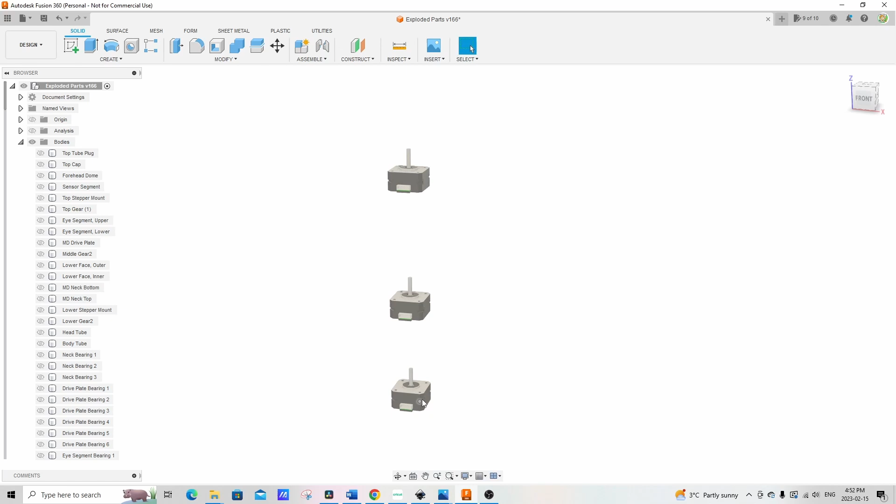Here's my Fusion file for the IG-11 head. I want to show you all the parts I've got in here and the ones I've adapted. Rather than using servos, we're going to start off with these NEMA 17 stepper motors. They're all identical, and they'll be programmed using an Arduino probably. We'll see how it goes, but that's my plan for right now.

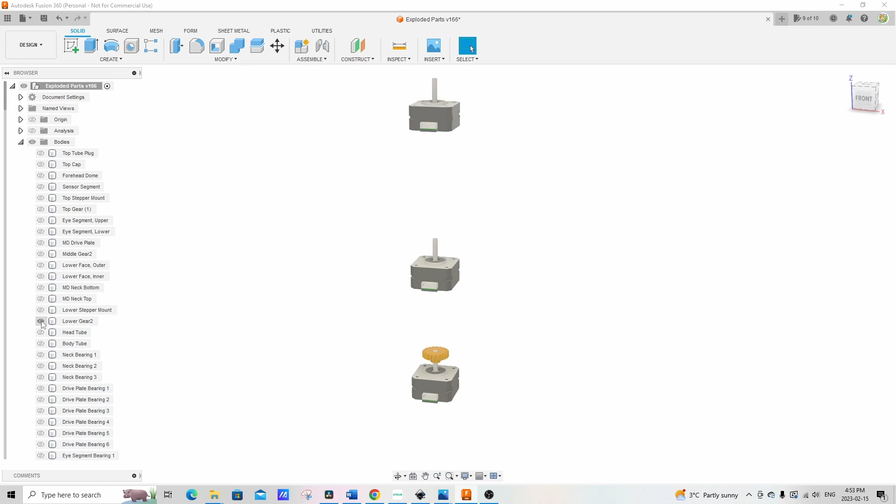On these we're going to have some gears, so I've 3D printed some gears for them - there's a gear, a gear, and a gear. These gears just fit over the top of the motor shaft, just a pressure fit, and hopefully they'll work out okay. Now let's take a look at the tube.

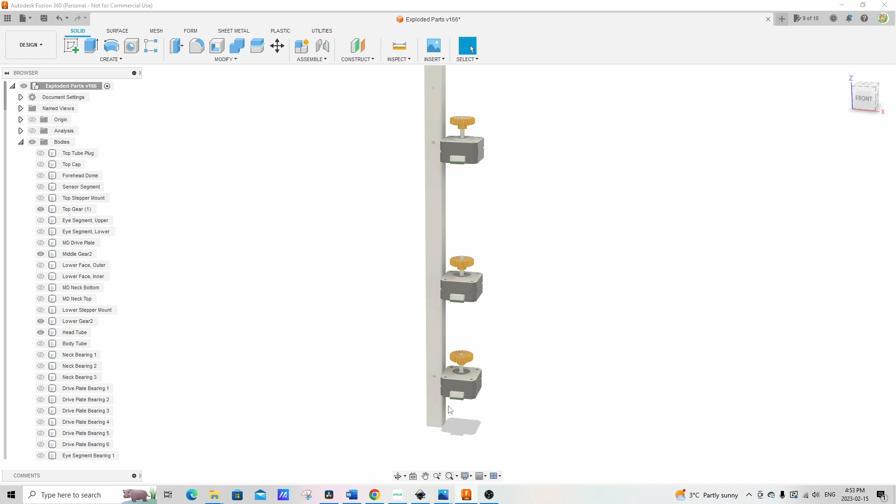This is the tube that goes up the center of the head. It's got holes in strategic locations. I've adapted the holes from the files that were provided to fit my motor system. Not only do they have these mounting holes, they'll have larger holes down here where the wires can go through and fall through the middle of the square tube.

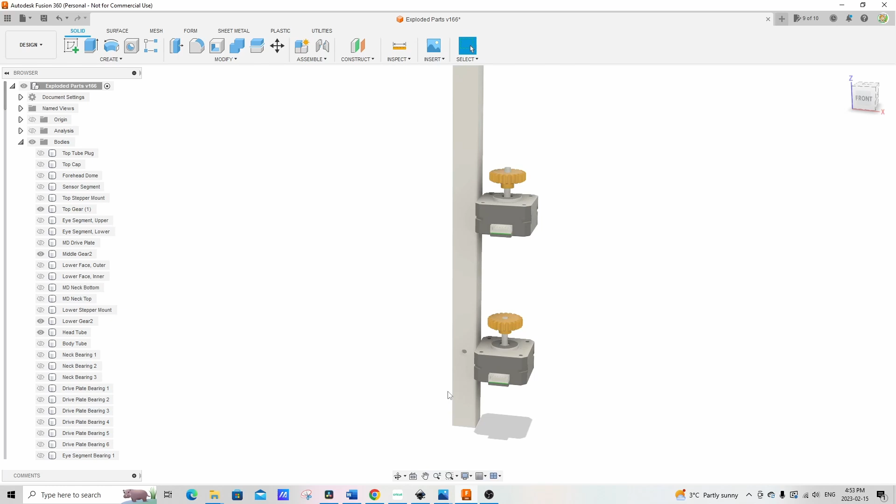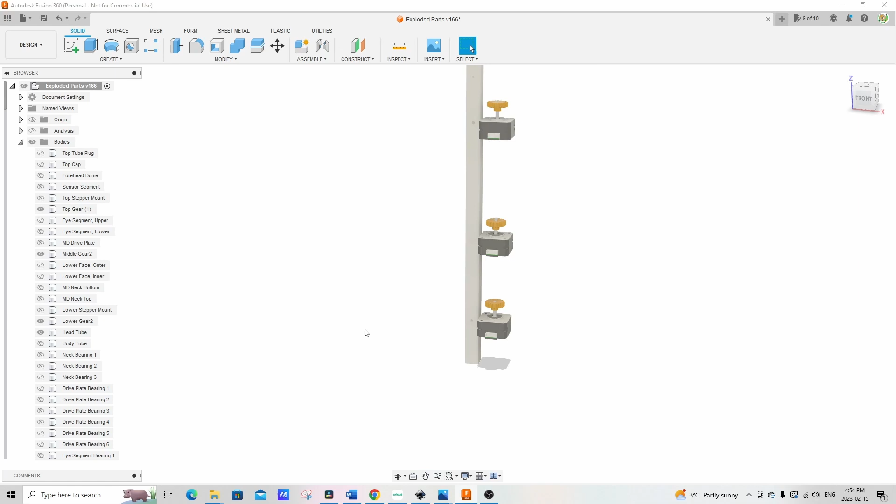So that's the tube. If you're building the whole version with the neck and the body and whatnot, there's a body tube, and basically these are 2 separate parts, they're just one long part. I've just got them colored differently so you can see where the head part stops and where the body part fits into the chest cavity. I'll take that off for now because we're not going to focus on that.

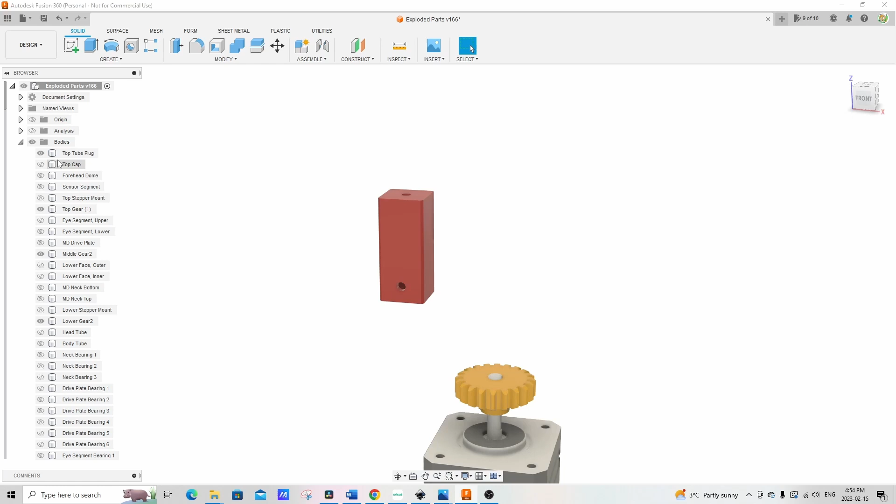Now let's take a look at the top. This is just a square aluminum tube, and the top has a plug that I've put together myself. I'm going to move the tube so you can see this is just a 3D printed plug. It's going to have a captive nut inside, so you can put a threaded M3 bolt through there, and one through here as well. The bolt through here holds that plug in place, so the top cap can get screwed into it. So that's what the top cap looks like.

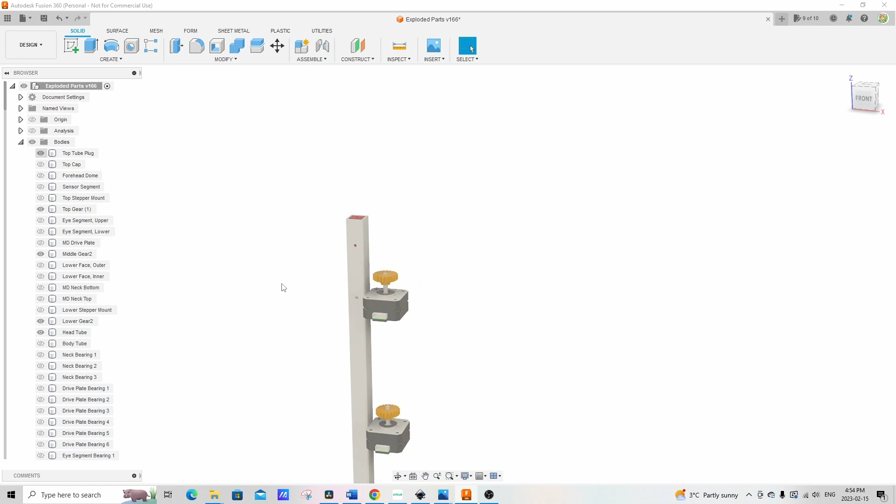But rather than that, let's just work our way through this from the bottom up. So here is the stepper mount that goes on the bottom.

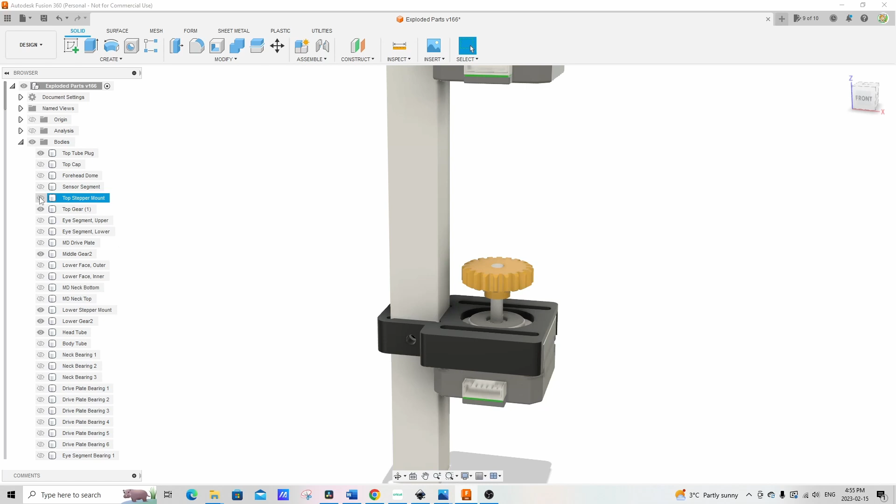So it's going to be attached with a metric bolt through here, and then bolted down here with 4 bolts as well. And there is also one for the top stepper motor, and the middle one doesn't need one because it's going to be attached a different way.

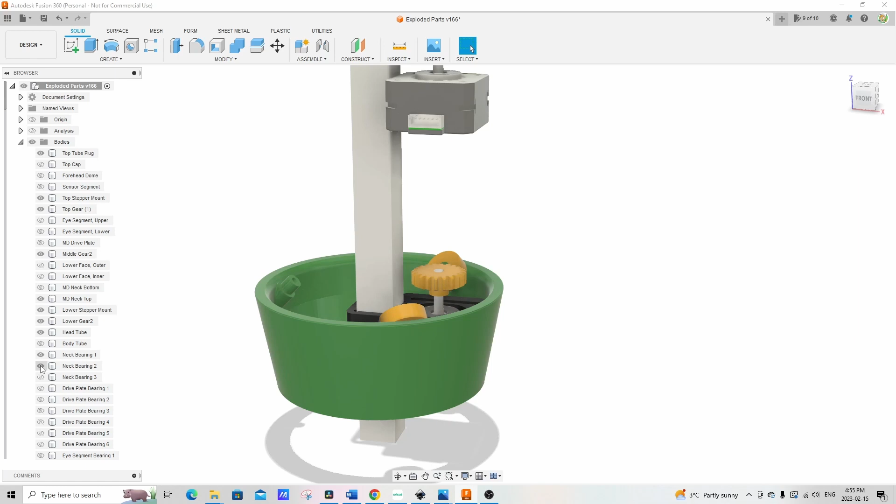So now that we have that, let's look at the neck top. So there it is. You can see that it's got a spot for bearings here. So there's a bearing there, there, and there. These bearings just get pushed on, and then there's a bolt that goes through and attaches onto there with a washer to hold it in place. And these just spin so that everything can rotate properly.

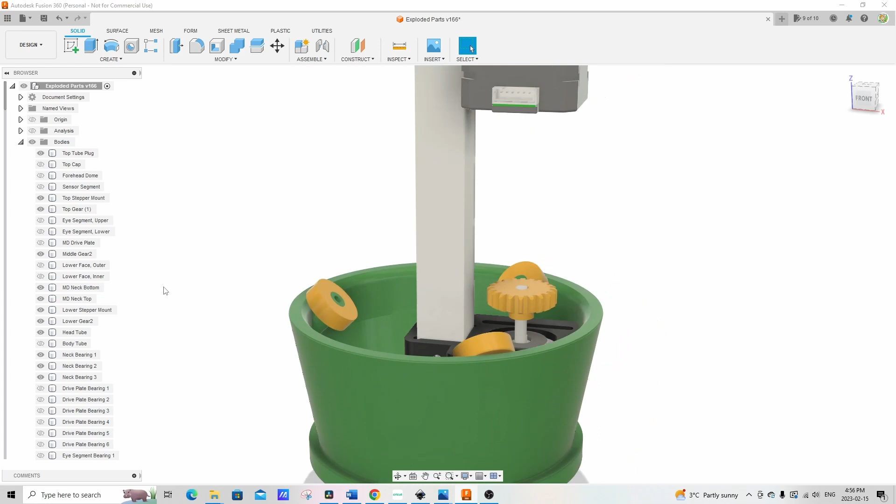I might not show you all of the bearings, but that's what they're going to look like. On top of that — sorry, that's the neck top. The neck bottom is this section right here. So let me just rotate that so you can see. You can see the bottom of the neck tube there. I'll just put this on analysis mode so you can actually see. So there's the bottom, neck bottom, and then the neck top, and basically how everything's attached.

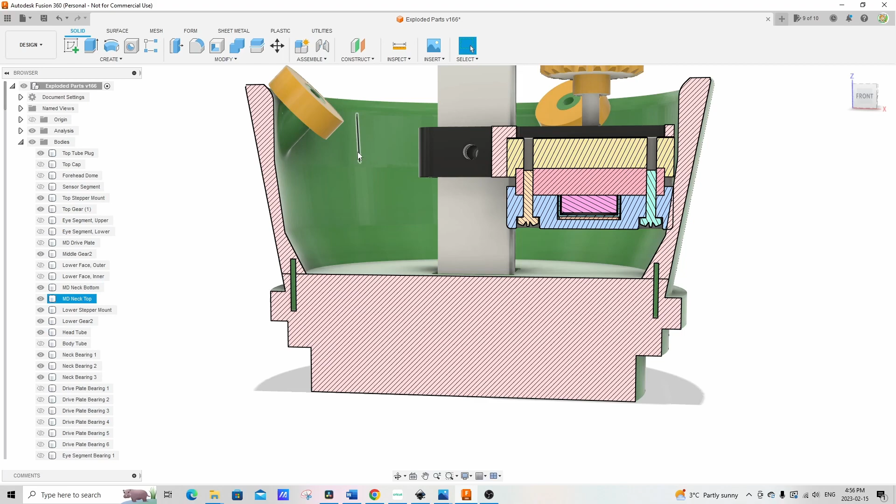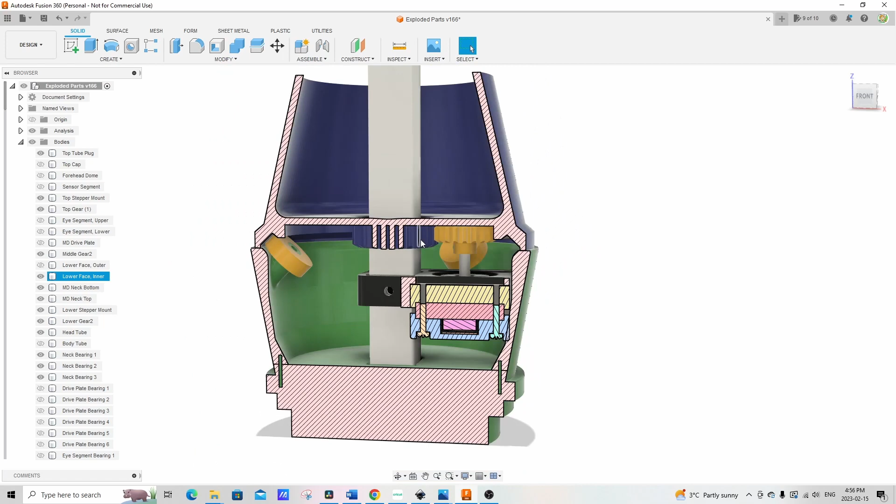So while I have that activated there, let's look at the next section. There's the lower face, the inner part of the lower face. So you can see that my stepper motor engages with the gear that's on that. And without the analysis on, that's what it looks like.

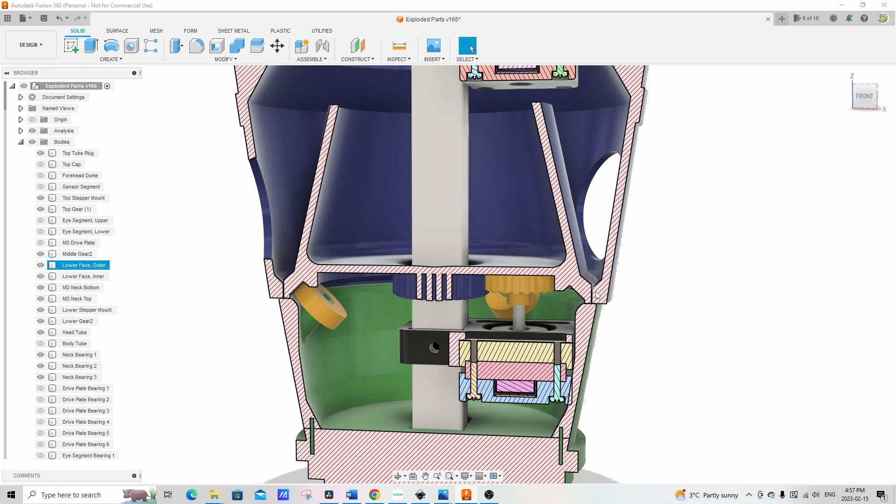And then that gets placed over top and glued in. So that is the inner part. That's the outer part of the lower face, and I'll just show you that in analysis mode. So you can see that it fits in right there. So it just gets glued in. I'm gonna finish the weathering for that before I glue it in, so I don't have to do that later.

And you can see that it's got the race here for the bearings, and then there's a race up here for the upper bearings. So let's move on to that.

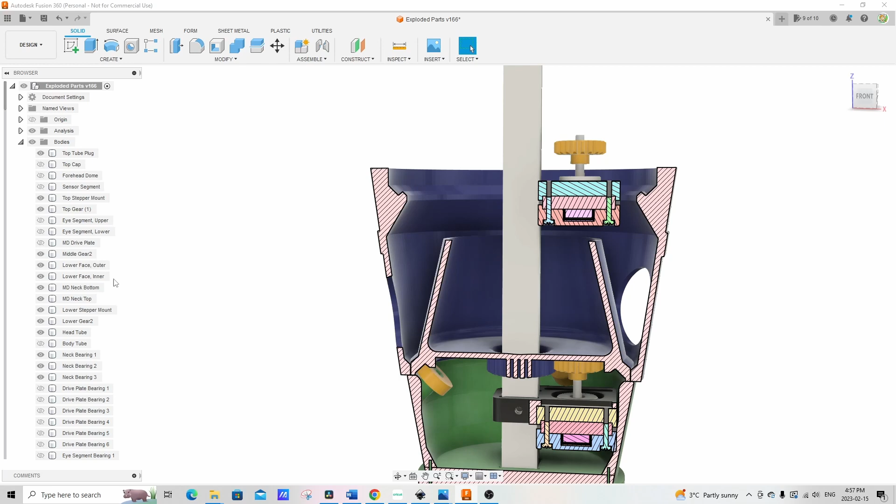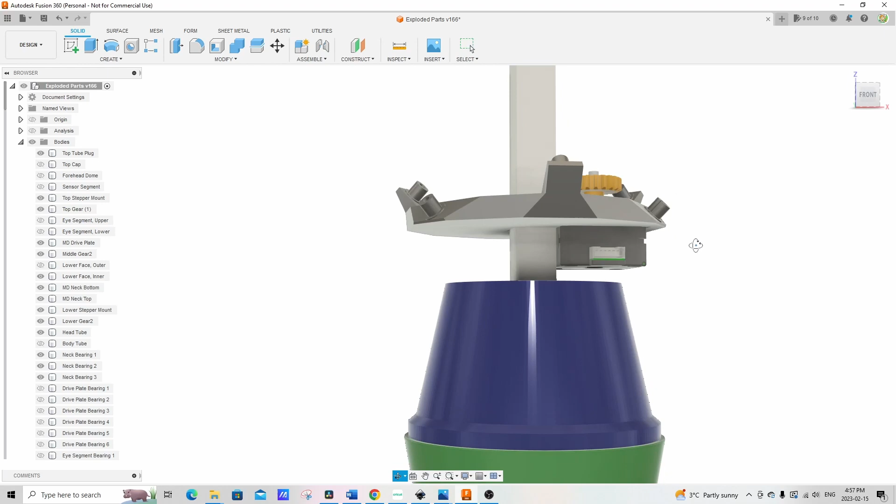Before I show you that, let's just shut that off. I'm going to take off that guy so you can see the drive plate. So this is my MD drive plate that I put together, and the stepper motor gets attached to it right here. It's not my very own drive plate — I've adapted it from the files. So you can see the stepper motor just barely fits along the edge of the aluminum tube there.

And then all of these spots are for bearings to go onto. Let me just bring that back. And the next one is that plate there.

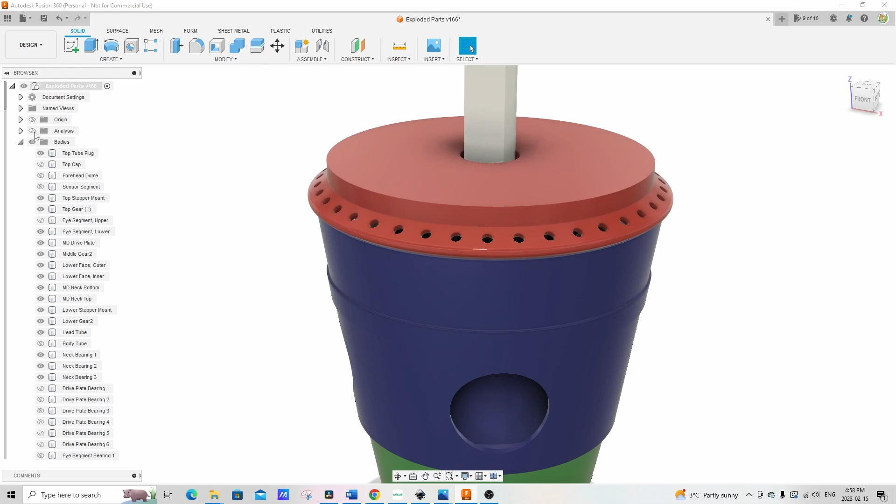That's the eye segment lower. So let's look at that in analysis mode. You can see that the stepper motor gear just meshes properly with that gear there, so it can rotate. And then there are races right here for the bearings to fit into, as well as on the other side there's bearings that go into this section as well.

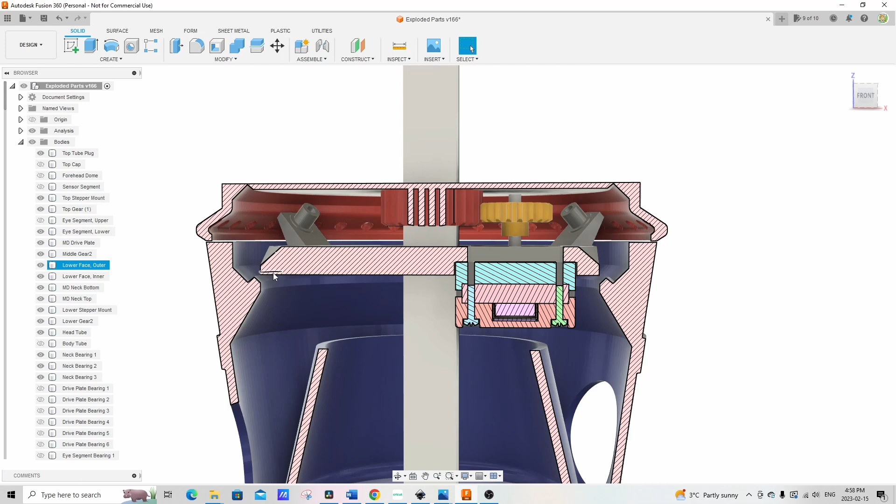So that's that. And then the eye segment upper looks like that. In here is a spot for the servo motor, which is going to attach to the eye that sticks out here and moves up and down. I haven't got that far yet. And then there's a spot for bearings right here.

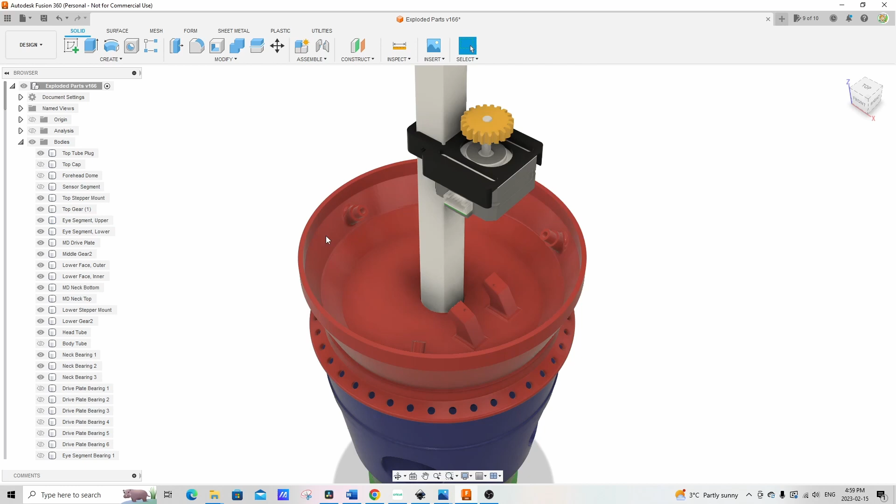And then the next section is the sensor segment. It looks like that. Inside of here will be another 3D printed housing that holds all the NeoPixels for the eyes to light up.

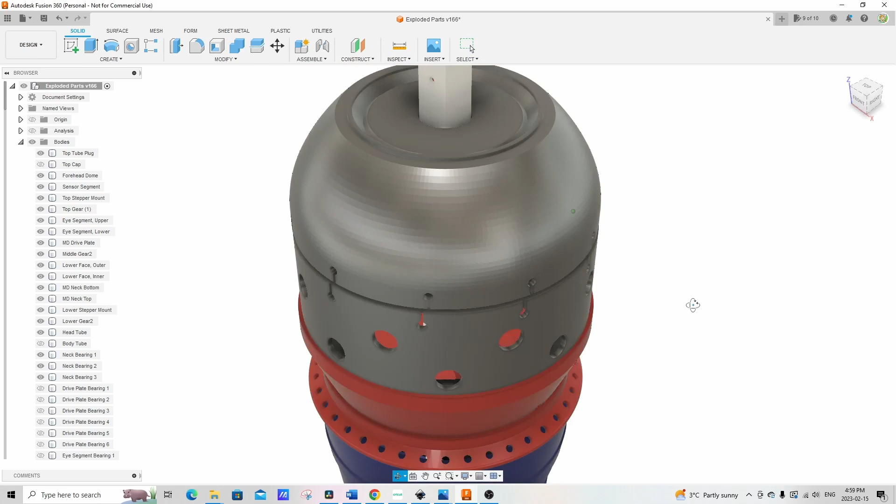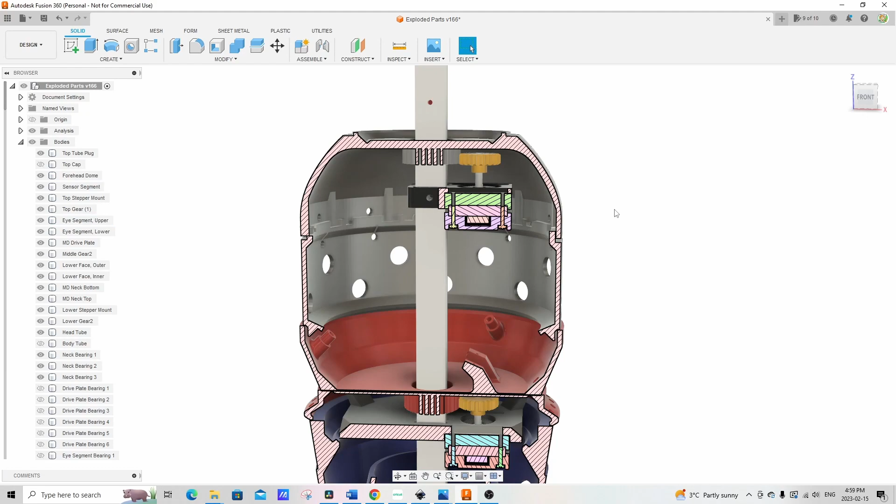And then the forehead dome looks like that. So let me put that on analysis so you can see what it looks like inside. Basically there is a gear here that meshes with that gear, so this whole section here can rotate, and there's a spot for the bearings here that hit the race inside there. And then on the very top is the top cap, which gets placed on like that. There's bearings in there that run along the race for that.

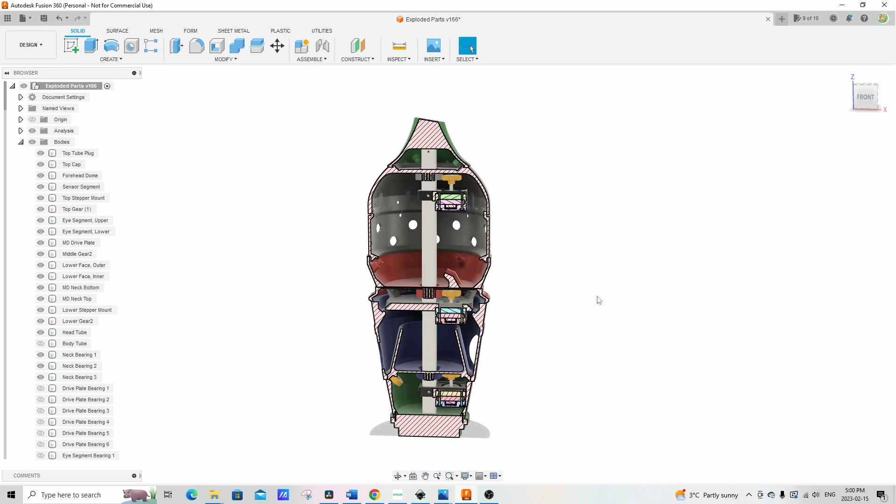So that's basically what the adaptions are that I'm using, that I've put together for the IG-11 head, and we're going to see how that goes. This is just a trial, so let me shut that off, and there's the different sections for them.

Let's move on. I'll just show you what the 3D printed parts look like, and then we'll get into the next step where we're going to power up the stepper motors and see how they rotate.

Okay, let's take a look at the parts that I've printed off for IG-11's head. I've printed them, sanded them, primered them. They're ready to have some weathering put on them, but before I do all of that, I'm going to make sure all of the animatronics work properly.

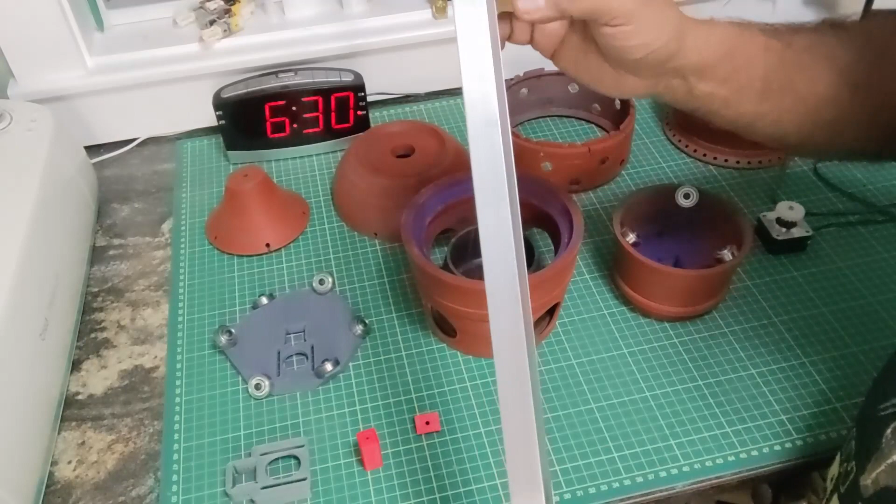This is the aluminum tube that is used for the animated head, and I've already cut it to length. I've also put a sticker on there to show me where the head part ends and the body part continues, and then spots for all of the holes.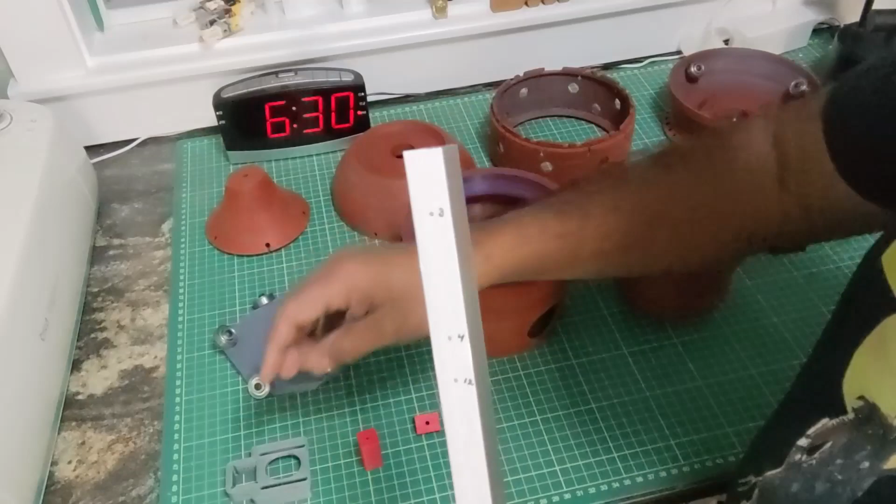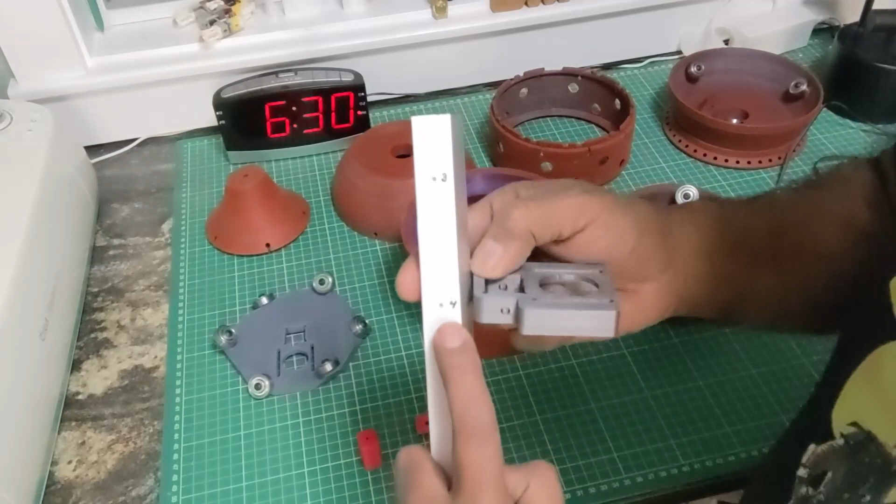Now these holes are strategically placed for my adaptations for stepper motors. So basically I've made these mounts that hold a stepper motor. This gets pushed down over top and slides down to where it needs to go, and then it gets held in place with a bolt. And all of the nuts inside are held on these sleeves that I have, so they put a captive nut in there, and then this gets pushed in, and then you'll have a place to bolt onto.

The top plug is one that I've designed that's going to have a captive nut inside for this side here and for the top, and this gets pushed down inside there to be flush, and a bolt holds that on.

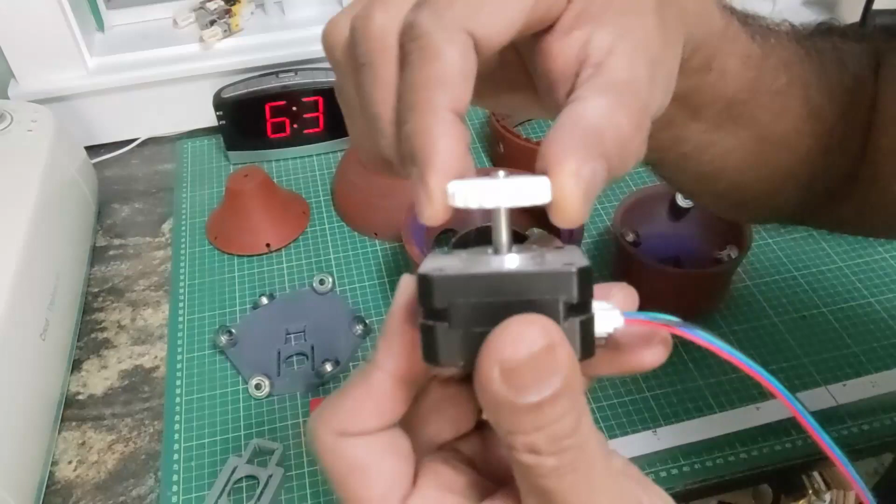So the stepper motors that are going to be used look like that, and you can see this one here has got the gear on it already that I've created. That should mesh properly with the gears that are already in the files.

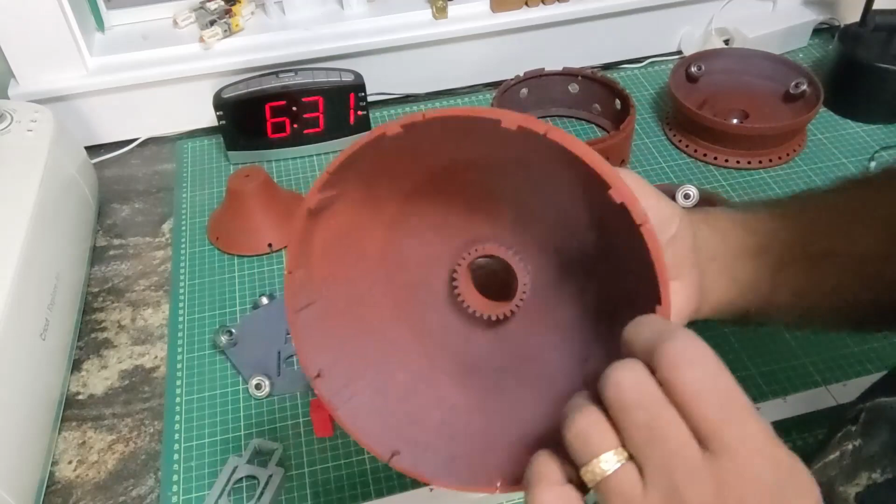So let's take a look at all of these parts here. This is the top cap. This one here is the upper dome assembly, and it's got the gear already in there. And then this is...

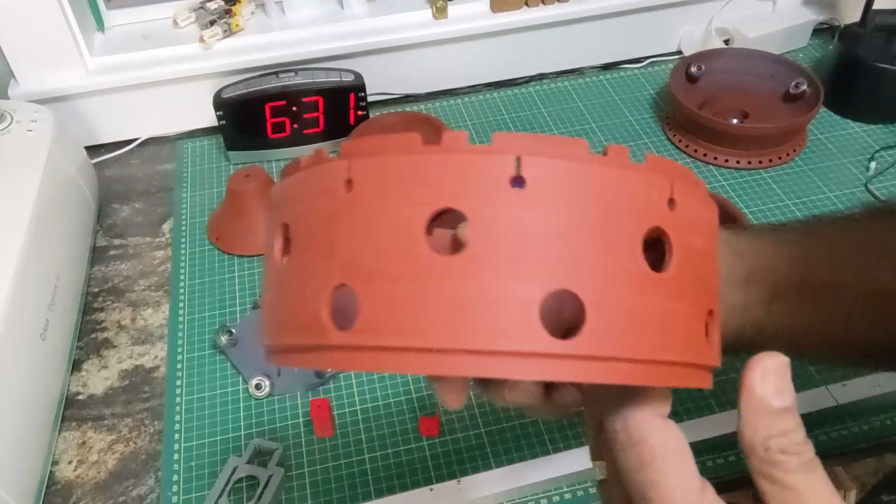The sensor assembly, and it pops right on. It's going to have the other 3D printed section in here that holds all the NeoPixels for the lights.

This is the eye segment assembly, and I've already got the bearings installed. This is where a servo is going to go, and then there's a hole right here where the linkage is going to come out for the eye to move up and down, and it's got the race in here plus a gear.

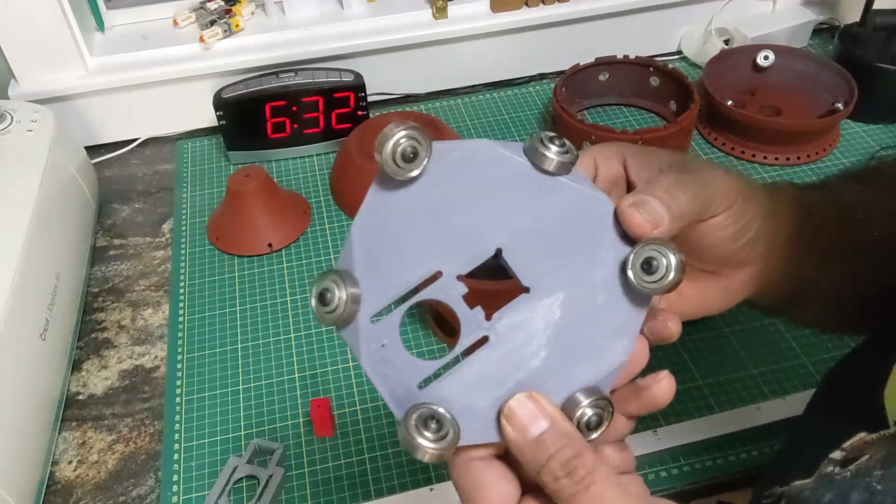This is the drive plate. I've adapted it. You can see I've got some slots in here and a recess underneath to fit the stepper motor, the middle stepper motor. There's a lot of gears on that one.

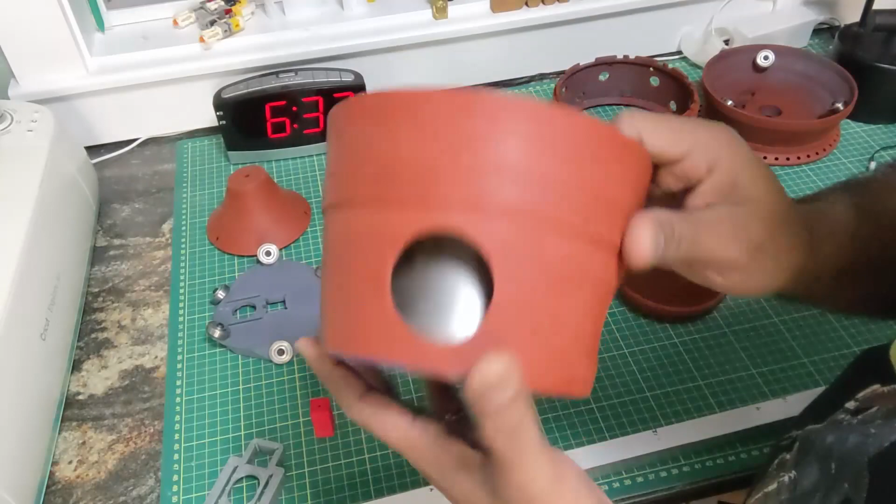And then we have the face assembly, inner and outer. I've already painted the inside part silver, done some weathering on it. It's got the gear at the bottom, and that's what it looks like on the top. This is the race for the bearings, and the race for the other bearings are down here.

This is the neck assembly. It has 3 bearings in it, and then this is the part that gets pushed on over top of the aluminum tube. So I'll put these together, and you can see what they look like as I assemble them.

Okay, I'll start with the neck, and on top of that I'm just gonna put these on. I'm not going to fasten everything together, just so you can see how it goes.

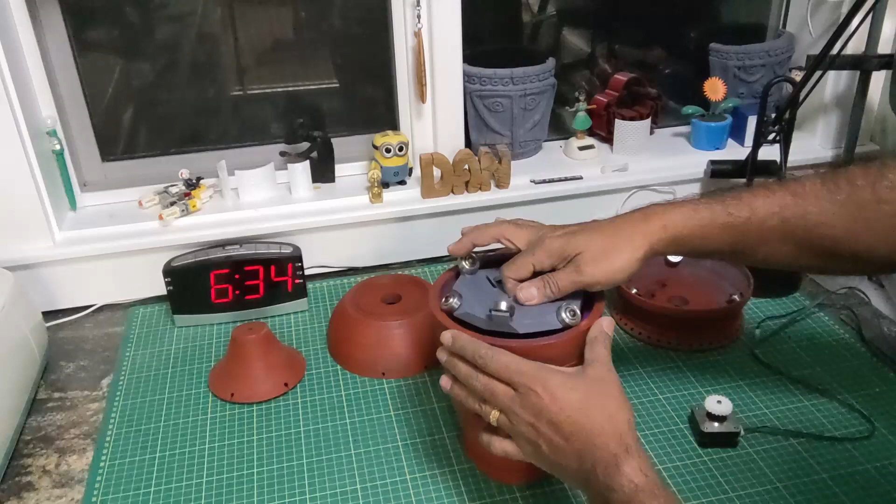This is the face assembly. You can see how it rotates there on those bearings. The drive plate will be going right in here so that it can rotate around.

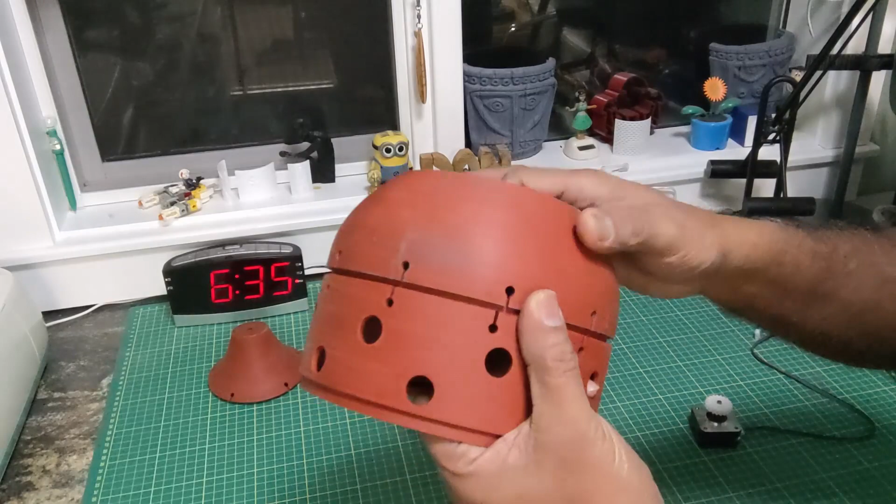And then these 3 bearings here are for the sensor assembly. They go on like that. Then the sensor assembly and the upper dome, they fit together. Let's get them slotted in here like that, and then that'll sit in there.

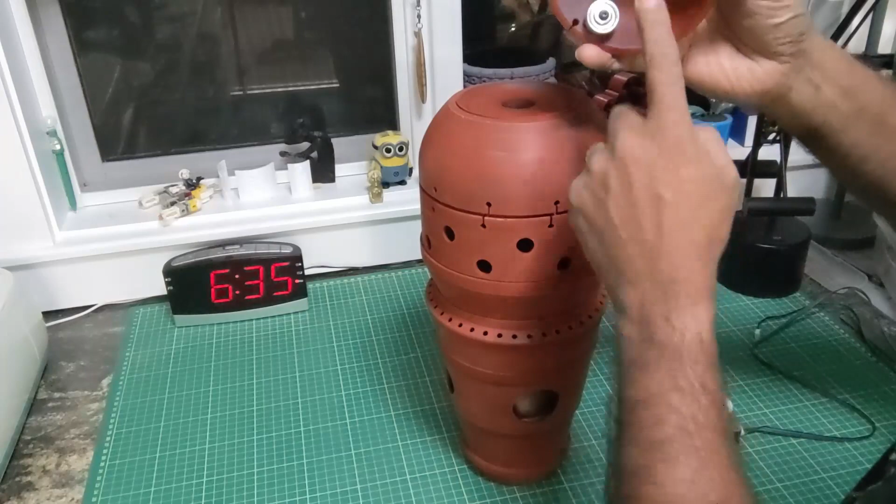And then the top cap, we've got 3 bearings for the race right here. So that's the entire head assembly, and it can rotate independently of each other in 3 different sections.

So, next is to install it all with the tube and the stepper motors, and then try it out and see if these stepper motors are actually going to work properly in there. We'll see how that goes.